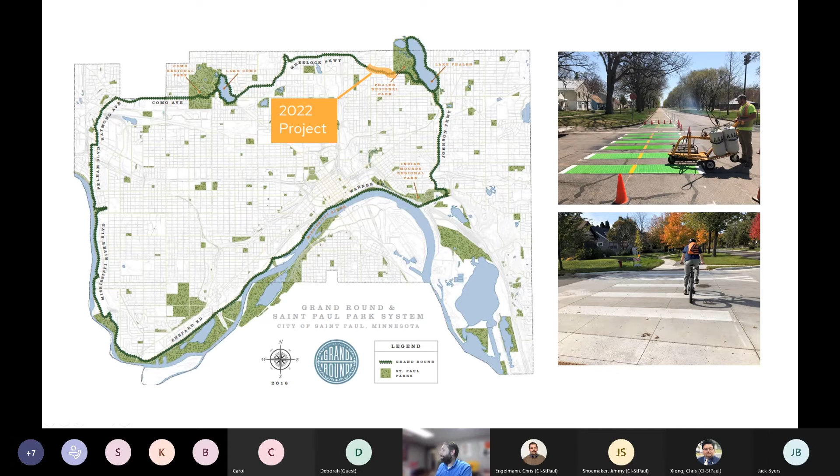This was the vision. It's part of the St. Paul Grand Round, a scenic parkway for pedestrians, bicyclists, and motorists that connects people to parks, nature, neighborhoods, and businesses. It's a way to encourage St. Paul residents to be out and about in the city, to get exercise, to enjoy green spaces, and just enjoy the city in a unique environment that's a little bit different from most of the streets in the city.

There's been a lot of planning and background work that's gone into the St. Paul Grand Round. I mentioned Horace Cleveland back in 1872 provided some of the initial recommendations, and bits and pieces of the St. Paul Grand Round have been implemented in various phases over the years. For example, the trails along Mississippi River Boulevard were constructed - I'm not sure when, but several decades ago.

The time has come to bring that same vision to Wheelock Parkway, and that's what we've been working on for the past few years. In the year 2000, there was a Grand Round master plan created. In 2015, the city adopted the St. Paul Bicycle Plan, which we are currently in the process of updating. In 2016, another document called the Grand Round Design and Implementation Plan was developed and approved by City Council. The St. Paul Pedestrian Plan is a relevant planning document as well.

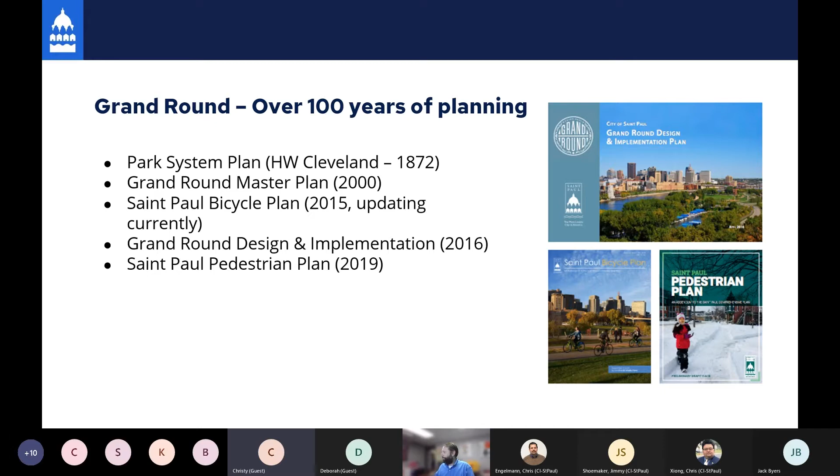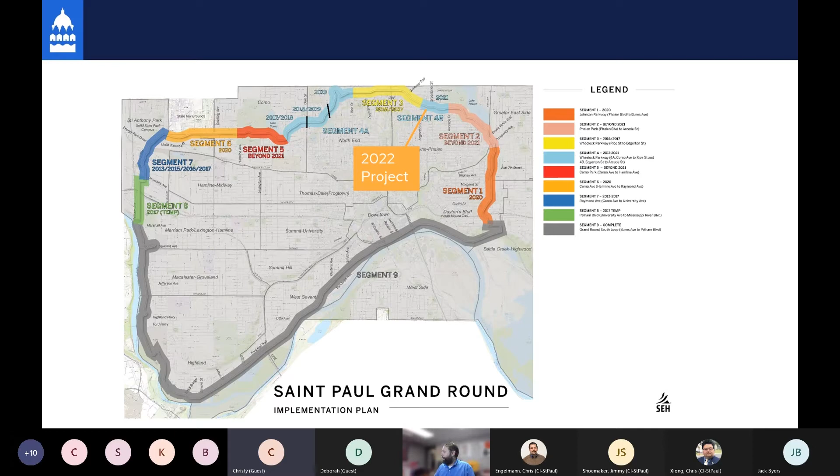This segment that we're talking about tonight, between Edgerton and Arcade, is really the last missing link that will result in a continuous trail connecting Como Lake to Phalen Lake. So pretty excited to see this phase move forward and excited to finally have that continuous connection.

A couple of related projects that we're not going to talk about in much detail tonight, but I want you to be aware of: what we're here tonight talking about is a reconstruction project of Wheelock Parkway to the west side of Arcade. This project will not include very much work at the actual intersection of Wheelock and Arcade, because this map is showing a MnDOT project scheduled for sometime in the 2024 to 2025 timeline. That project will include a more comprehensive scope of work at that intersection. We know that there are a lot of needs at that intersection, and it just makes more sense to take on those needs as part of the MnDOT project as opposed to part of this project in 2022.

The other project I'll mention is that also next year, this map on the right side is showing Wheelock Parkway to the east of Arcade - so Arcade to about where Wheelock turns into Johnson Parkway, over here at East Shore Drive. The City of St. Paul will be doing a mill and overlay of that segment. That is a much smaller scope of work than what we are talking about to the west side of Arcade, but it will grind off the top couple inches of pavement on the roadway there and repave it with smooth pavement. So it's a much smaller, much quicker scope of work that will be completed probably in the fall of 2022.

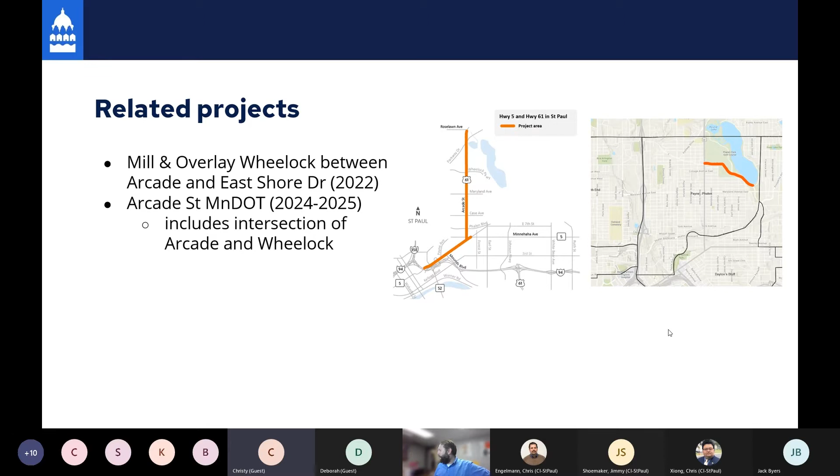Good evening, everybody. My name is Chris Engelmann. Everybody has reference to me as the project manager. I feel like that's a special title, but really that just means my role, with input from a large number of people, is to bring all that information together and implement it into a project.

So I work in the St. Paul Public Works street design and construction portion of the city. The biggest portion of my responsibility is really to take all the concepts and input that we've already developed through a lot of the outreach that Reuben alluded to, and then start looking at the engineering aspect of what's needed in this environment.

Reuben, if you can throw the next slide up. So we have a scope area. This area is, like Reuben indicated, phase 5. It's connecting to the work that has already been done on Wheelock Parkway just east of Edgerton. We're going to pick up and carry that work and do all the infrastructure work from that spot just east of Edgerton to just west of Arcade. We'll tie in all the different side streets, make sure everything ties into Wheelock appropriately, and then evaluate what's actually needed on this corridor and develop it in the way that has been established as part of the concepts to date.

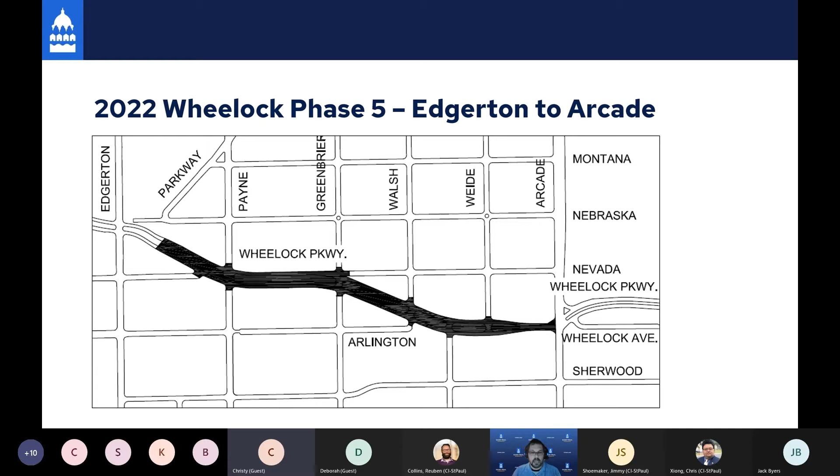If you can advance the slide for me. You can see the existing conditions out there. So a big part of my role, and the work with my team and working with other teams throughout the city, is to take a look at this and figure out what the problems are, what we can fix, what we can improve, to make it good for everybody using this corridor.

The things you can see on there: at Greenbrier, you see an existing roadway intersection. You can see there's limited curb and gutter, or it needs updating. The pavement surface is cracked and ready to be replaced. Lighting is there, but it's not to what we call a city standard or level of illumination that provides both roadway and pedestrian way work.

Lighting for people to walk through the area, but also the ADA ramps could be improved upon. Some of them have the necessary domes, some have good grade, but some others don't. There's also a number of areas where we want to improve the pedestrian crossings, not the ramps themselves, but the sidewalks through the area. For the most part, there is a good existing sidewalk in place along the corridor.

As we talked about before, and we'll talk about further, there is also the median trail that will be implemented. You can see how it currently ends just east of Edgerton. We'll be picking that up and carrying it through and connecting it to the trail that's currently in place east of Arcade, so you'll have a good solid connection for pedestrian, bike, and vehicle traffic.

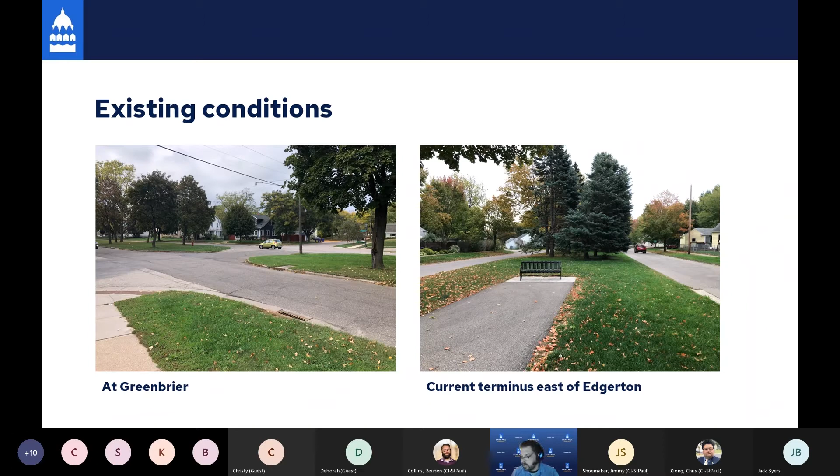Things that you can't see that we also bring together and make sure everything's up to current standards: water pipes, sewer pipes, our stormwater system. Improving the base and the stormwater infiltration is also planned. Improving the storm drainage on the surface is also a big part of what we're evaluating as part of this construction.

So we develop and work with our St. Paul Regional Water Service, our St. Paul Sewers Group. We work with our traffic lighting group and implement a variety of specialty engineering disciplines, connecting that with the concepts, the policy, and the planning that has gone into developing the Grand Round system for this segment.

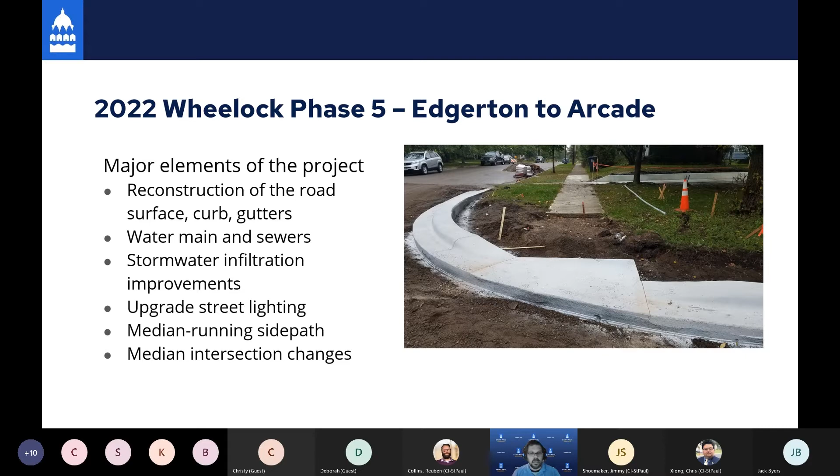For right now, if you could advance the slide, we're anticipating the plan to include pretty much all these elements on this typical cross section. You can see that it's very similar to what's out there currently. The traffic lanes will be there, the median will be there, and the bike trail, obviously, will be new. There will be trees - there will likely be some tree removals and more tree, and then adding of trees.

We will be doing some upgrades to our stormwater systems to include infiltration. So generally it's something you won't see on the surface, but there will be a rock trench that will take the water collected on portions of the roadway and put it into the groundwater system rather than piping it to the river.

In general, there will be slight deviations or modifications to what we call the geometry of the roadway, so where the curbs are going to be, to both facilitate improved safety or vehicle flow, and also hopefully improve the opportunities for the trees near that curb to survive, so we don't have to damage as many roots. But for the most part, we're keeping everything very similar to what's currently out there.

You can also see on this picture the pedestrian light system. It's a lantern style that City of St. Paul uses. If you have seen any of the work on Wheelock to the west, this would be very familiar to you.

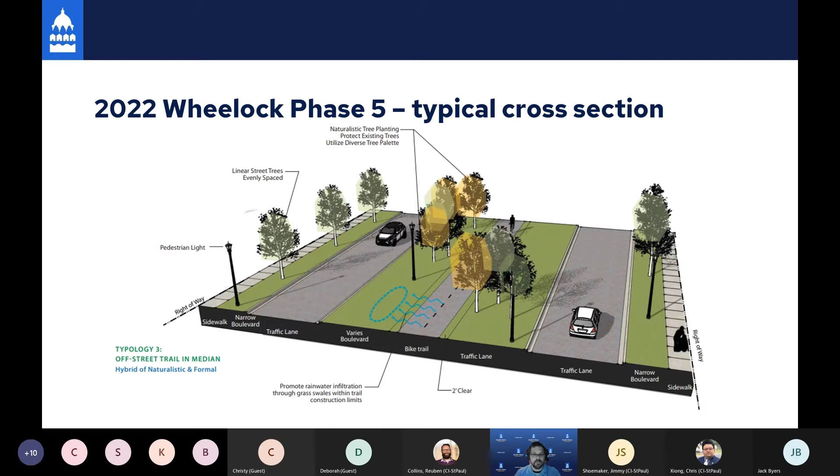The current status where we're at now is we're doing some of the public outreach. We're also doing public preliminary design, trying to get all the base maps and figure out what work needs to be done, start asking the hard questions about the detail elements of what and where, with sidewalks, water pipes, sewers, and what's going to work, what's not going to work.

We'll be working on some of those preliminary aspects and incorporating your comments, listening to your questions and saying, oh, that's a good point, we should really pay attention to that, and adding that to our final design, which we'll be doing nominally this winter, which is November to February. We'll be designing and engineering and doing a variety of other coordination activities with all our partners at the city and outside the city.

The plans and the specifications, basically the bidding documents, are what the deliverable is that we'll develop. Once we get to the spring, we'll be getting that ready to bid. You'll also see some pre-construction outreach, so we'll be letting people know what and how and when we'll be coming through. But the most important thing you'll be wanting to watch for, especially if you're a resident on the corridor, is the public hearing in coordination with council.

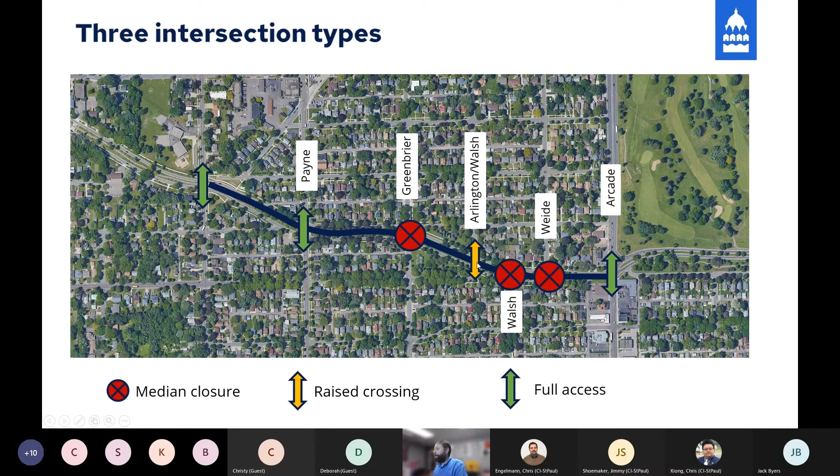The reason Arlington in particular is getting a different treatment than Greenbrier, Walsh, and Weide is primarily because it is the most centrally located between Payne and Arcade. So we know there is definitely a need for people to get across the Parkway and to turn across the Parkway, and we think it is least impactful to local circulation to keep that one median open at this Arlington Walsh intersection here in the middle.

So what is a raised crossing? This is the treatment planned for the Arlington and Walsh intersection. This is an example, a picture of a treatment you may have seen—we've done a dozen plus of these now at various locations along Wheelock Parkway and Johnson Parkway. And if you can tell in this picture, this intersection area is made out of concrete rather than asphalt.

That's one difference. But what these white arrows here are pointing out is that the crosswalk is elevated above the street about 6 inches or so, not a lot. And then these concrete panels on the side ramp the street up to that crossing and back down.

What this does is maintain access for drivers, so you still drive on it, you still turn across it, you still make all of the same turning movements at these locations as you do today, but it encourages drivers to slow down because it turns into a little bit of a speed table, is a word we use sometimes. It's just a little harder to go through it at higher speeds—it kind of forces you to slow down to navigate that change in elevation a little bit.

It also signals to drivers that something is different here, something unique, and that they should pay attention before driving on this unique raised crossing.

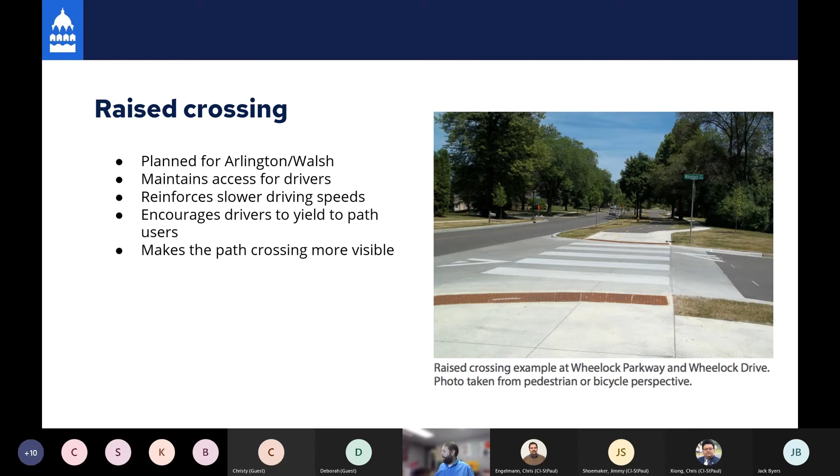But one of the best ways to increase safety for people on the trail is actually just to close the median there, so there's no conflict between drivers and people on the trail.

This picture is an example along Johnson Parkway, where we performed a number of median closures last year. There used to be a street crossing east-west across Johnson Parkway right here, and now you can see there's just green space, providing room for trees and grass, and eliminating entirely the possibility for cars and people on the trail to impact each other. You can see the sidewalk still crosses here, so it still maintains access across the parkway for people walking and biking.

In that sense, it's even an improvement over existing conditions for people trying to walk or bike across the parkway, because now they have a wide refuge area, and when crossing the streets on either side, they only have to navigate one street at a time.

We're proposing 3 of these closures, which will have some impacts on how and where people are driving across the median within the project area. Some number of people driving will have to choose different routes than they typically take today.

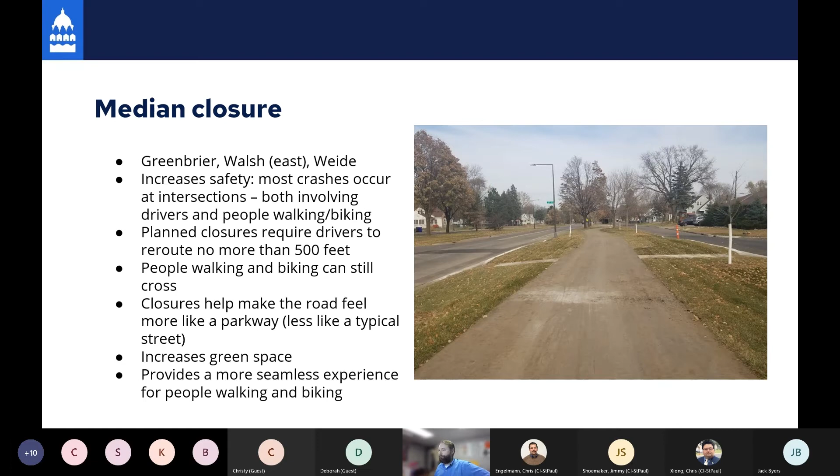So we wanted to talk about the traffic that may get rerouted as a result of some of these closures. To do this, we recently performed a peak hour traffic count at these 4 intersections, observing traffic volumes during an evening peak hour to get a sense of how many people were actually using these intersections. We counted for 2 hours from 4 to 6 p.m., a pretty typical PM peak hour count in the traffic industry.

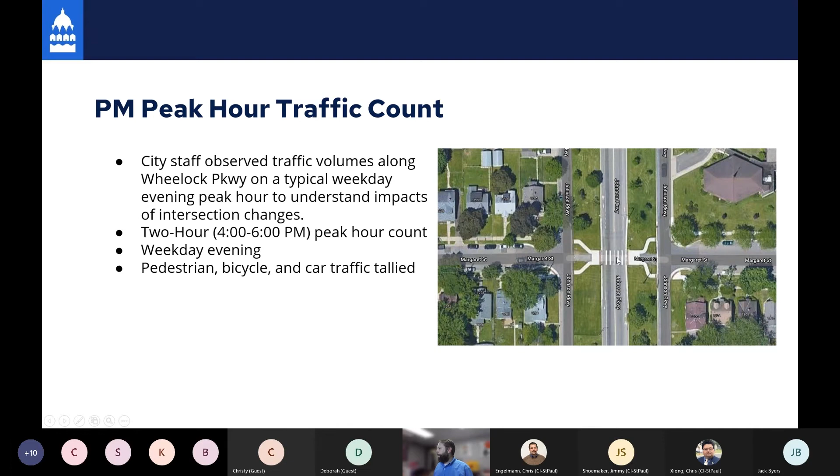While we were out there, we counted people driving, walking, and biking. This picture on the right is another location along Johnson Parkway, at Margaret, where we've also done some median closures. Johnson Parkway is a little different, as it has a mainline road in the middle with frontage roads, and Wheelock is configured differently. But this does a great job demonstrating how these closures still continue to facilitate pedestrian and bicycle crossings across the parkway.

So I wanted to go through intersection by intersection. We'll start at Greenbrier. Here's an image of Greenbrier today. You can see I've shaded in green what the new curb lines might look like here, and all of the new green space that will be created as part of that intersection closure.

I'll quickly mention, we don't have any graphics showing it, but we are looking at alternatives to this area up here where Nevada comes in, which creates this really awkward intersection. We are looking at alternatives that tweak the geometry to make that situation a little bit better, but it doesn't have any access or impacts on access at the location.

During this 2-hour count that we did, we counted 989 cars, 38 pedestrians, and 19 bikes. Of those 989 cars, about 6%, or 58 drivers that we observed, would be impacted by this median closure. 4 of those drivers were making U-turns, 41 were making left turns, generally pretty evenly split between people making left turns onto Wheelock Parkway and making left turns off of it, and 13 were just going northbound or southbound through the intersection. So all in all, it's a pretty small volume of drivers impacted by the closure at this intersection, roughly 6% of the traffic we observed during the peak hour period.

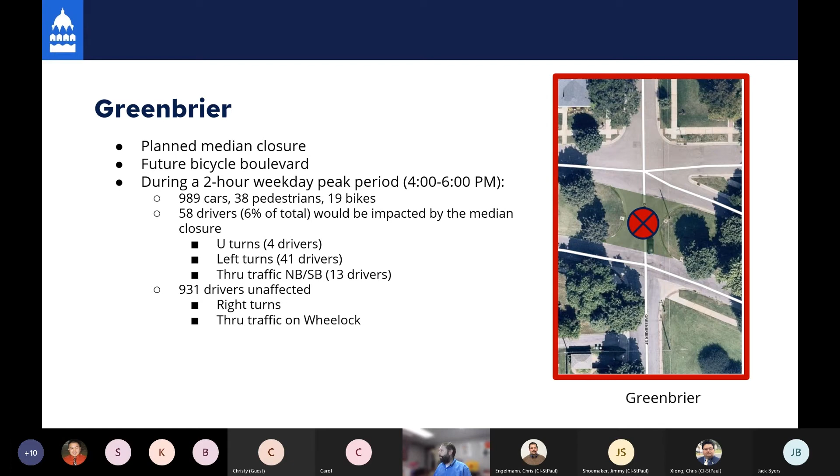At Arlington and Walsh, this is the location where we're proposing to table the intersection. Note that I did not color this in green here. This will continue to be a driveway across the parkway, and it will continue to be a 2-way driveway across the parkway. I want to point out that Arlington is 1-way westbound on the west or south side of the parkway here. That will not change as part of this project. It will continue to be 1-way westbound, but this area through the median will continue to facilitate 2-way traffic as it does today.

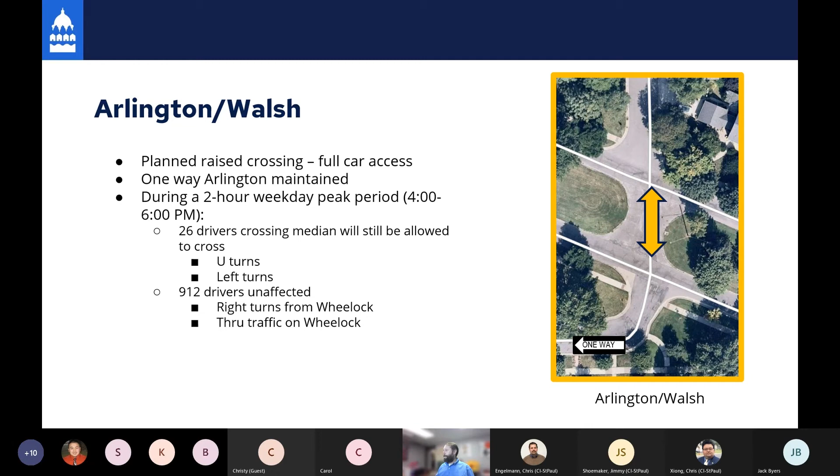During the same 2-hour time period, there were 26 drivers that crossed that median. Those 26 drivers will continue to make those same movements, so they will not be impacted. I think I've said this a few times now, but this raised crossing here shouldn't impact how people are circulating around the neighborhood.

An example of what a raised crossing might look like at that Arlington intersection. There's a good example we constructed back in 2016 on Wheelock Parkway, just west of Edgerton. You can see these same kind of white pavement marking arrows that announce how this driveway is ramping up to cross the trail. The trail is continuous through that, but it's still a two-way driveway that facilitates left turns, and people can make U-turns here as well.

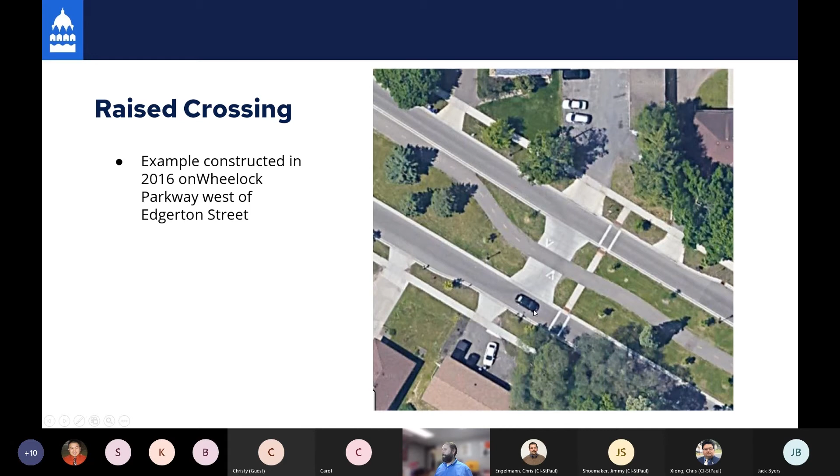The Walsh eastern leg is another one of the planned median closures. Again, this is a T intersection today, a little different than the Greenbrier intersection we looked at earlier. The green shading here shows approximately what that might look like. 906 cars, 24 pedestrians, and 16 bikes during this 2-hour PM peak hour. Again, about 6% of the traffic volumes would be diverted by this median closure.

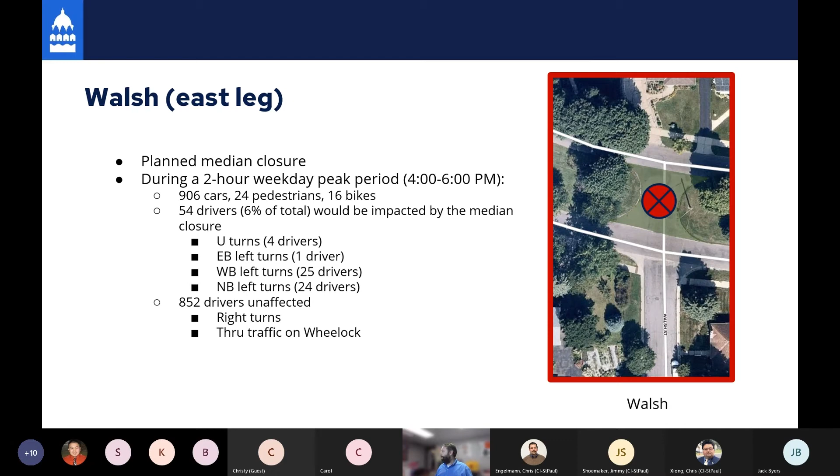I won't go through all of this, but you can see the breakdown of the different movements those drivers were making today. I'll point out that there were 25 westbound left turns made at this intersection. I'll have another slide where we're going to dive into those 25 cars in a little more detail, so I just wanted to point that number out.

The last intersection, again pretty similar, another T intersection with 886 cars. At this one, we only counted 17 drivers that would be impacted by the median closure, that's only 2% of the vehicles using this intersection today.

So I think the important thing to keep in mind about these median closures is just how low volume these streets are today. It's a very small number of cars that are being diverted, and the streets that these drivers may be likely to be diverting to are also very low volume streets.

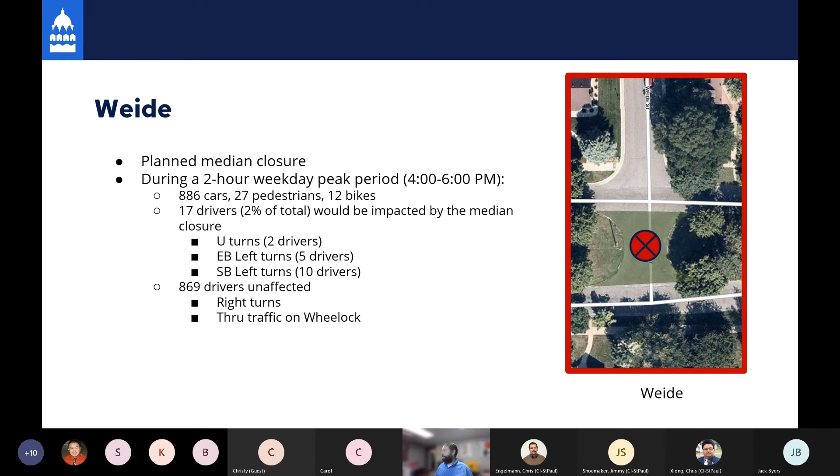So all in all, it is our belief that the change in volumes on any of the surrounding streets will not generally be enough to result in any substantial changes to traffic volumes as they exist today on all of these local side streets. This is a summary of

the 3 intersections: 58 at Greenbrier, 54 at Arlington, or at Eastern Walsh, and 17 at Weide. The number of vehicles again within a 2-hour period that would need to find a new route. We think most of those vehicles will go to Payne and Arcade, which is a fairly small volume overall. So again, these are fairly small numbers overall in terms of traffic volumes that we generally see.

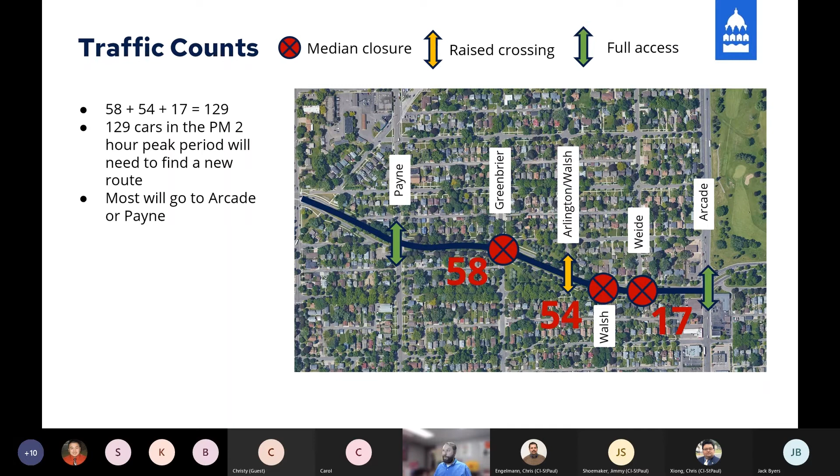It's also worth noting that it's very likely the people making these turning movements today at these intersections are making very local trips. These are not intersections where you turn if you are planning to drive on Greenbrier for several miles. If your trip is several miles long, you probably already are and probably should be on Payne or Arcade rather than trying to use Greenbrier for a long distance trip. So these trips that are being diverted are very hyper local and likely most heavily impactful to the people who live within a block or two of Wheelock Parkway.

So here's an example of what we think about when we're trying to evaluate what might change with some of these closures. So I mentioned, for example, this blue arrow here. There are 25 vehicles during that 2-hour period that make this westbound left at Walsh.

And where are those vehicles coming from? Some are probably coming from Arcade, southbound on Arcade. Some are probably coming northbound on Arcade. Some are coming westbound on Wheelock Parkway. They get to Walsh and they want to make a left turn. They probably live somewhere within a couple block radius of this blue star that I have marked here.

So what will people do instead if they can no longer make a westbound left? In this example, some of those 25 cars will go to the Arlington Walsh intersection where the tabled crossing will be, where they can make that U-turn, come back and make a right turn onto Walsh. Some people, if they're coming southbound on Arcade, might just go past Wheelock Parkway and turn right on Sherwood instead. Coming northbound on Arcade, you might be likely to just turn left on Sherwood rather than come up to Wheelock Parkway and circle around.

So again, this is 25 cars over a 2-hour period that might get split between, you know, 3 potential routes. There are probably other routes that people might take as well. And so if you can imagine the 25 cars being distributed over 3 potential routes, all in all, it doesn't amount to much of a substantial change in volume on any street in particular.

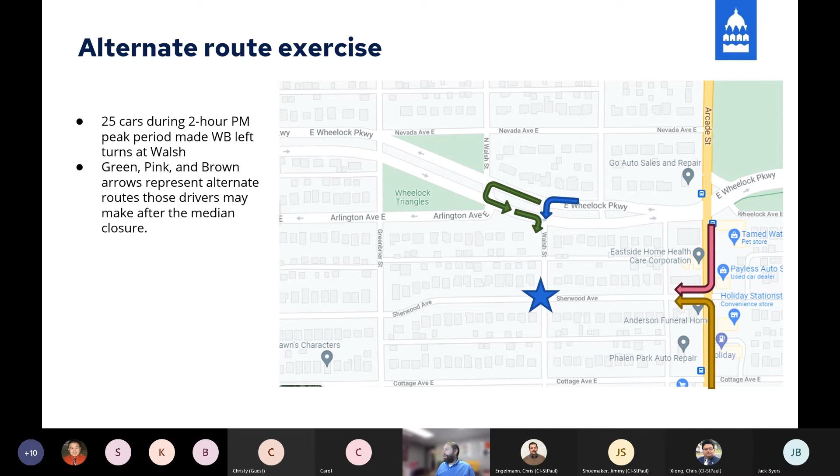Again, I want to stress the high likelihood that most of the people who are impacted by these closures probably live in the neighborhood, probably live within a couple, 1, 2, or 3 blocks of Wheelock Parkway. And so when we think about traffic diverting onto our streets, there might be some callers thinking, well, I don't want traffic diverted onto my street.

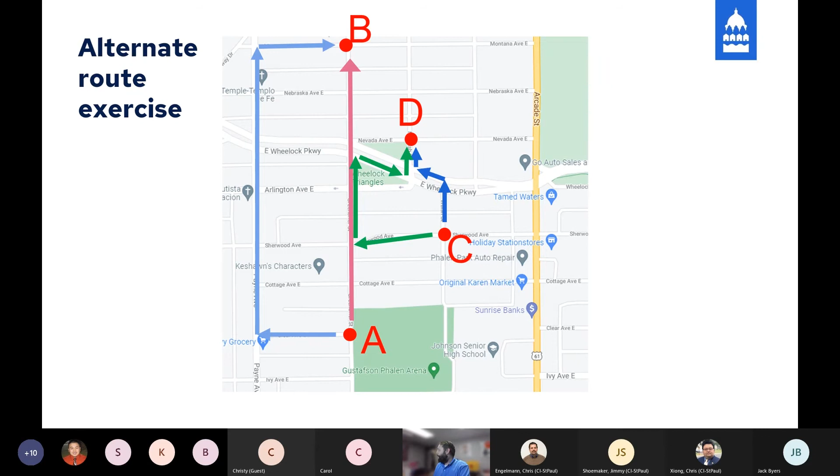Just to recap the timeline, we're doing public outreach and information right now. We'll spend the rest of the fall and winter doing design. We'll be doing some additional outreach again in the February to April timeframe, and then construction in the fall of 2022.

We really want to hear from you sooner rather than later. If you have comments or questions, we'd love to take them tonight, and we will. It's important for us, for our design process, that we hear any questions or concerns that you have sooner in the design process rather than later.